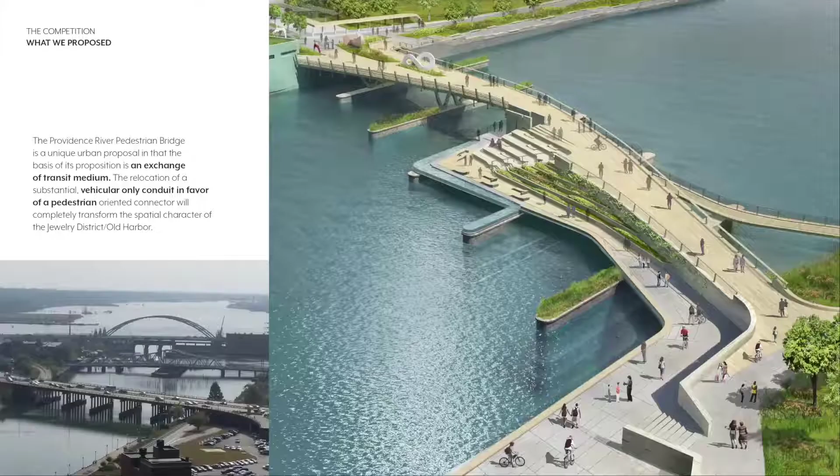This was way before I started working at inFORM Studio. The whole point of this project was to convert an existing vehicular bridge to a pedestrian bridge. Actually, more like relocating that bridge, because it created such a divide between different portions of the city. So they needed some type of connector to facilitate growth between different zones in the city.

What we proposed was more than just a connector. It's something that integrates properly. You have the knowledge area here, where up top you have RISD, the Rhode Island School of Design, and you also have Brown University, and there's a knowledge district. That's downtown, closer to the west. So the whole point is how do you link these two areas together in a way that you can achieve a cohesive and well-developed connector between these areas.

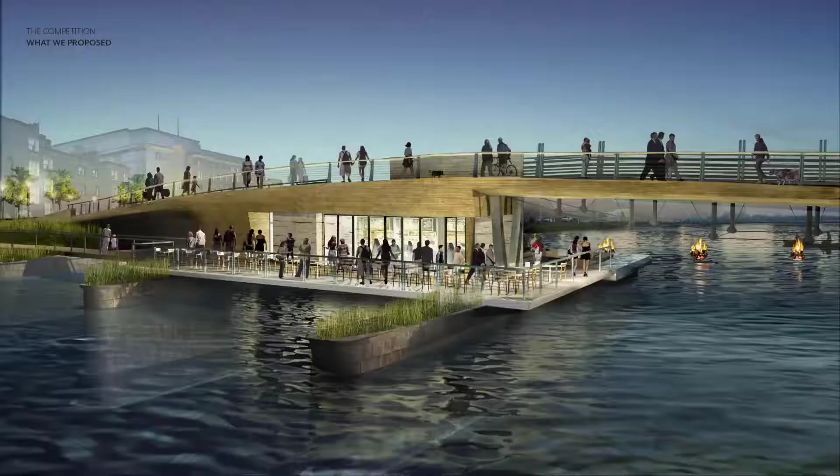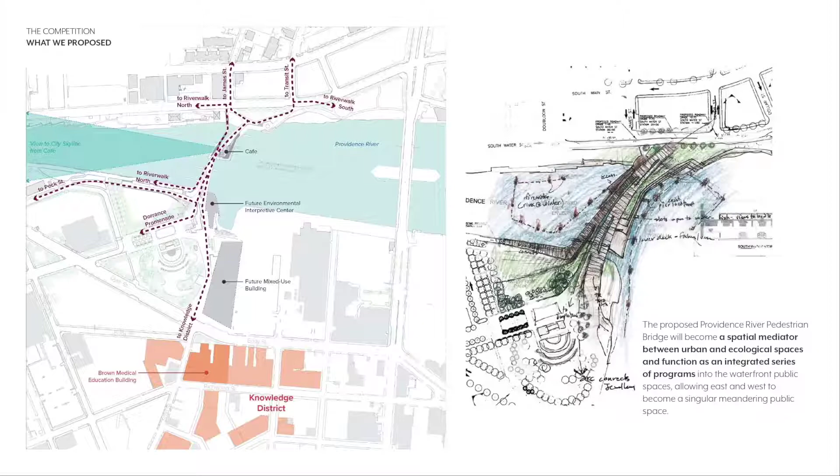This project was meant to have a restaurant or cafe type happening on the bridge. So it's not just people walking over, but people can stay there and actually experience it, create an experience for people, not just going from one end to the other end. This is a view of what we proposed, the cafe.

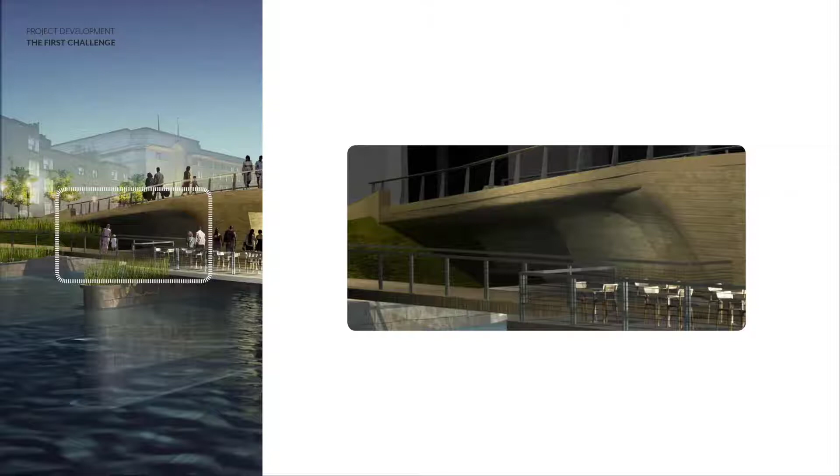The point of the presentation today is how did we achieve this for a project that was proposed in 2010. The challenge though is if you look in that highlighted area, it looks very clean, like we're trying to achieve this boat-like double-curved wood facade. But the reality is this is the Photoshop before it was post-processed. You can see that the textures here, no one's going to build this. This doesn't look like something you can build, this is just Photoshop. And when you take a look at the base file that was used to generate it, it's just not something you can work with.

Now it kind of looks like I'm calling my firm out, like guys, we just put things together. No, but the whole point is vision precedes computation. You have to start. They could have gotten to this point and said, we can't do this, let's redesign. Instead they stuck with the vision, presented it, won the project, and the question is, how do we now build this? That's how you start with the problem. Now you're trying to solve something, and that's the whole idea behind computation.

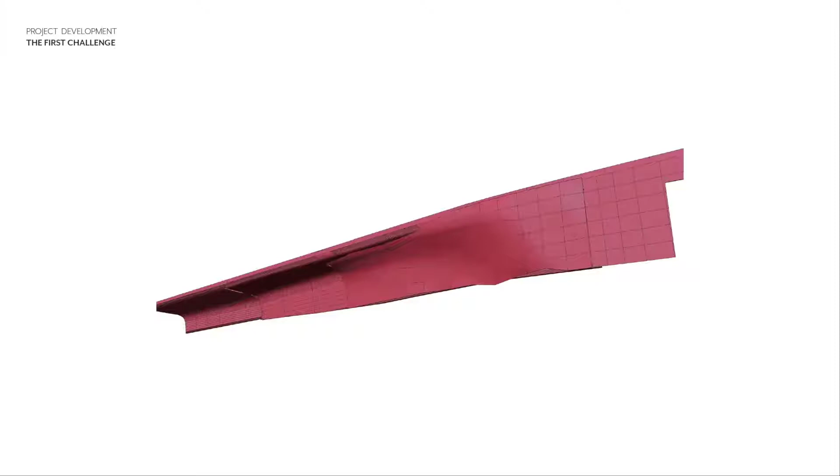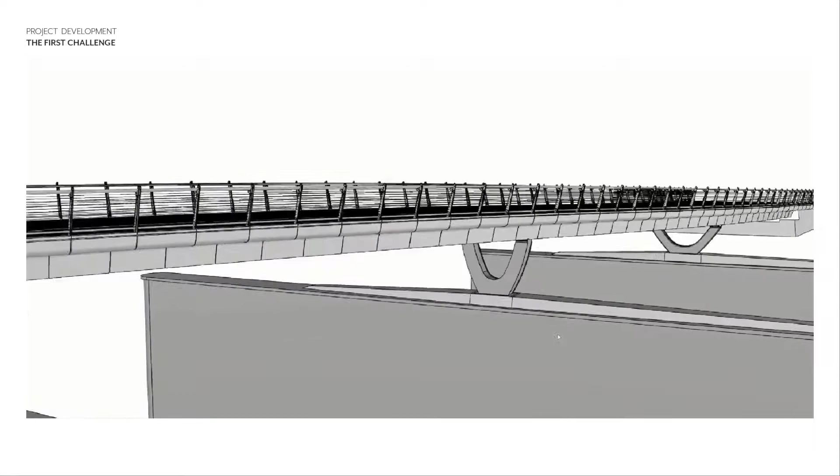So how did we go from this to this? That's that scheme, but how did we get from there to this? Is the question we'd like to answer today, because again, going back to that whole vision precedes computation thing, if you don't have a problem to solve, then you don't even know the right tool to use to solve it.

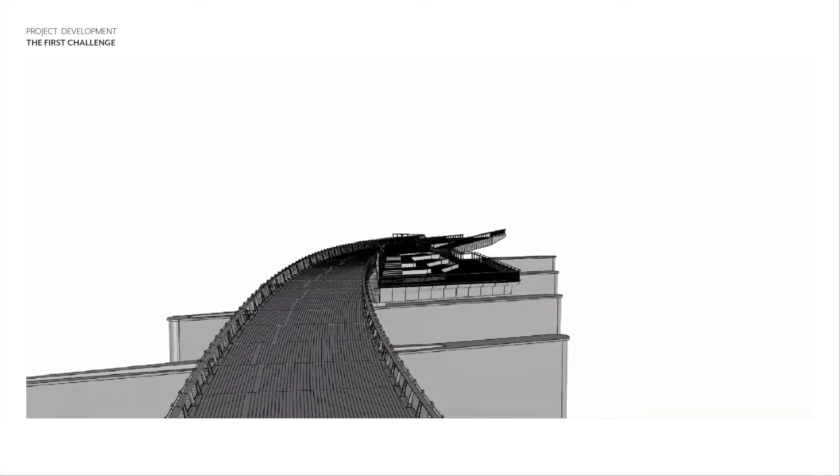That initial model was done in 3ds Max, and you cannot do any type of construction drawing whatsoever in 3ds Max. That said, all we had were the plans and some sections, to illustrate the idea behind how we see this thing working. So, can anybody guess what our solution was at this point? Jump to Revit, right? No, Revit can't handle the double curve.

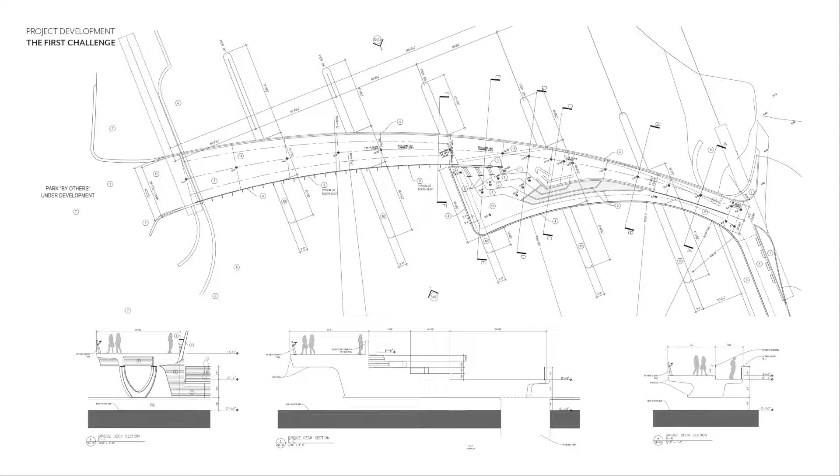Revit can, but at the time we were doing it, Revit was not the best tool, because I actually started developing this in Revit, and then I got to a point where I thought, this doesn't make sense. So I reached out to my bosses, hey, can we get Rhino? And it was easier than I thought, we got Rhino that same day. And yes, now this has a double curve, it's doing what we tried to get it to do.

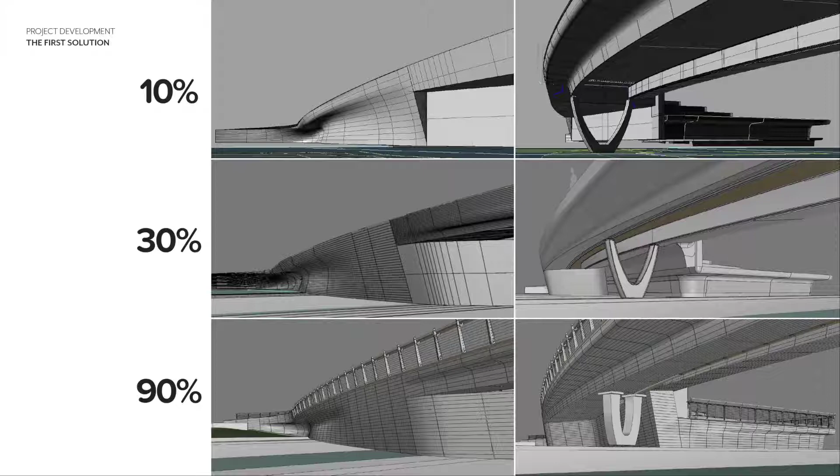But as we started going through the project, you can see the different phases. At 10% development, at 30%, it starts to get more refined. But at 90%...

Things just went crazy dealing with the repetitive process, because then we had to put in the engineer's drawing and some beams are sticking out, and I have to remodel this manually to get it to look right. It's driving me nuts. Design changes.

Mike's here, he's smiling. Hey Zub, can you change this? Oh my goodness, change it. Things go crazy. And then the form itself just wasn't practical to build. Like everything is just different. It isn't rationalized in a way that the people who are going to build this thing, they're probably going to look at this and just laugh, like, are you a joker or something?

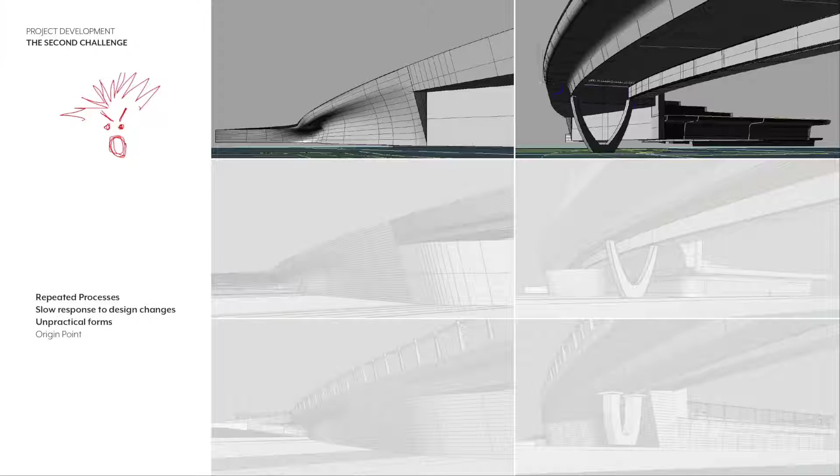The other part, which I didn't highlight, is managing origin points in Rhino. It's not a big deal, but the beautiful part about this is it got me to go to New York. And I was able to resolve it.

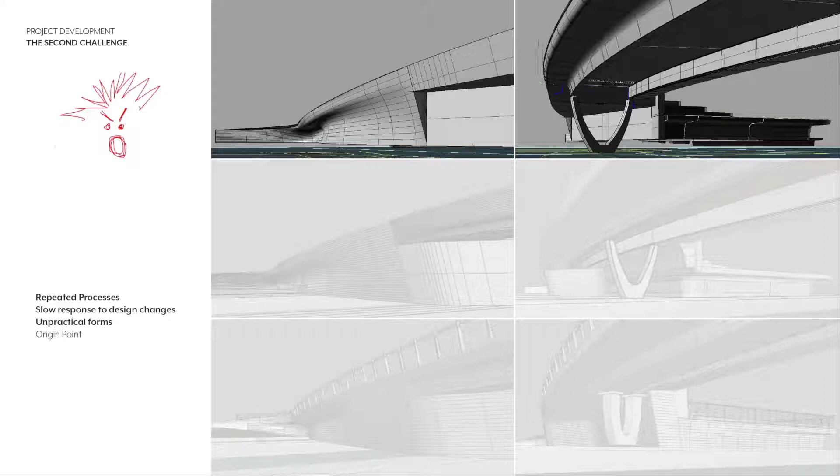But the interesting thing is, as I was thinking about this, computation seems to always send people to New York. For the people who use these tools, either you're going for a conference or you have a project, I think we should make it a goal for computation to actually come to Detroit. How about people come to think about computation and they think about Detroit? That should become a personal goal for everyone here.

And so out of frustration, my co-worker figured, all right, Zub, what you doing? And I kind of talk about my projects, and Renee tells me about Pierre, who is here. And I'm like, hey, Pierre, I'm finding this thing difficult. And Pierre goes, wow, you've already started doing it the wrong way. Oh, great, how helpful. But he pointed me, gave me pointers, like sent me to the Grasshopper forum, the community.

And why I posted this here is because computation requires a community. Like, you can't do everything yourself. You're gonna have questions, and you need people around who understand these things to kind of point you through how to go along. And also, I'm not going to take credit, but you need to be curious.

Like, I could have also been like how I said inFORM Studio had vision to keep pursuing it. I could have been like, well, yes, we can't do this after all. And then I don't know what will happen next. But I was curious to find out, wait, but people do these things. How do they do them? And that's the thing, curiosity drives computation. Something that's very important. And you can't teach curiosity. You just have to want to know.

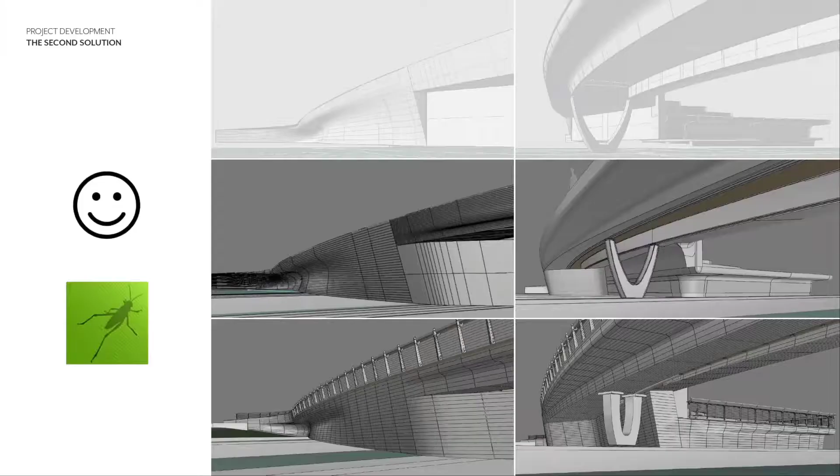So at this point, things were going great. Grasshopper was working fine. We got to this level of development. As you can see, initially, along this line, this is just an extrude along a curve. But as you start to see here, it gets complex. It's not uniform anymore. It starts to taper and become a flat panel.

There's no way I could have done that in Rhino, but then again when the engineer brings that structural file, things are just going to go crazy. So, how did we tackle this in Grasshopper?

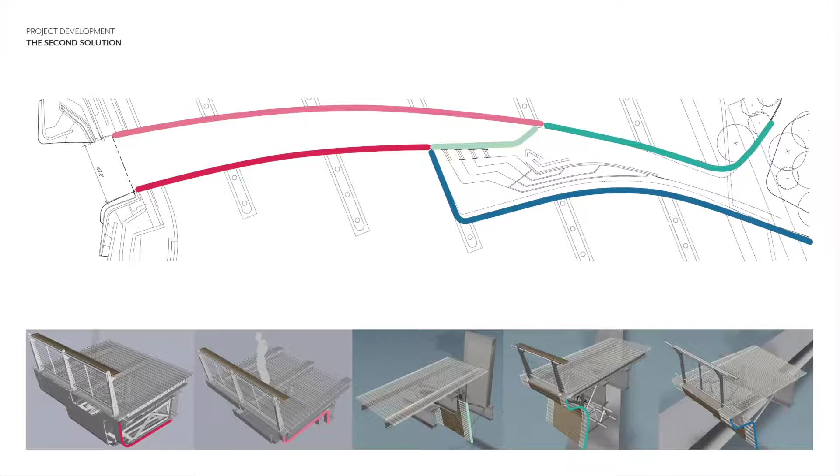First off, we decided to figure out what are the profiles, and by profiles I mean the section of each panel, like how are they positioned in this project. So we outlined 5 different panels. We knew we have 5 different panel types happening at 5 different locations in the bridge. And what we did was start to create a relationship between...

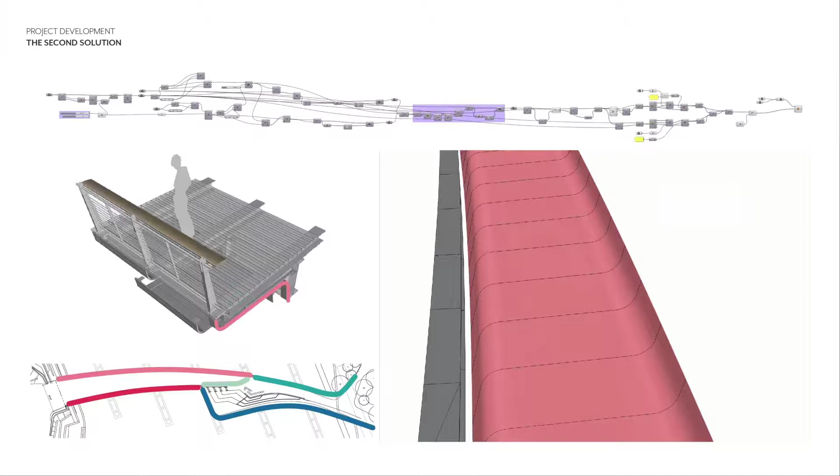Say, the curves or points, essentially, different points on different curves, and we started to manipulate that relationship. This is essentially different lines. We could divide, our input here were 2 lines. The top line, which defines the edge of the bridge, and the bottom line that defines where that bridge is at this point. So the point here and the point here, we created a relationship that resulted in a curve. And that means we can adjust everything in between. And that way, when the engineer decides to move their structure out, well, we can easily adjust to accommodate that without me having to repeat that process again.

And that's like Leland showed, that was the script. And I don't put it here to scare anyone. This is just our reality. Like, we have to deal with what we're up against.

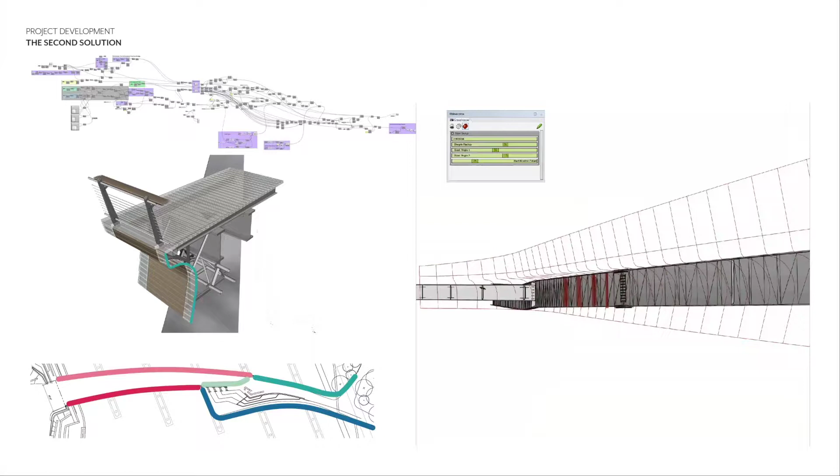And so the next thing, which was the more complex part of it, was the dimple. You can see that essentially it was just 3 curves that we had and used to generate that curvature of the bridge. So at this point we're able to get the surface from an array of different lines, and then with that we get the actual surface that we needed.

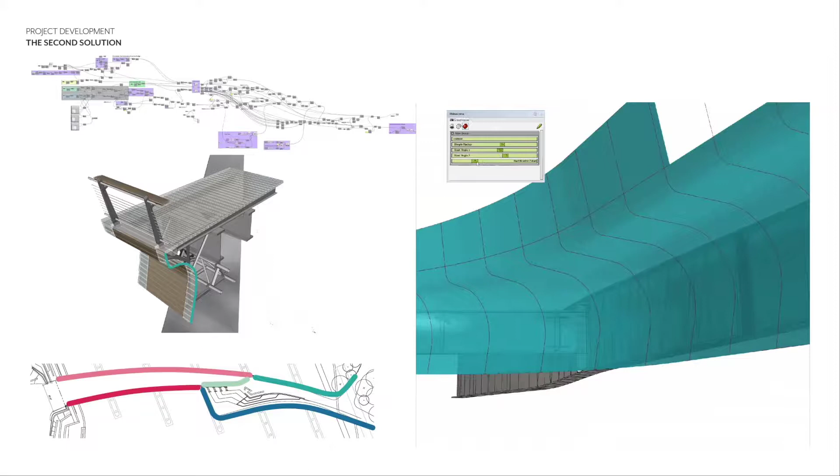Again, this is something that comes with Rhino, where instead of people seeing all the script, I can have them just view the sliders they need to adjust. No one needs to know what's happening in the back end. We're able to toggle in real time, hey, this form needs to do this, or needs to be away from the beam by XYZ amount, and we can pull toggle for that to happen.

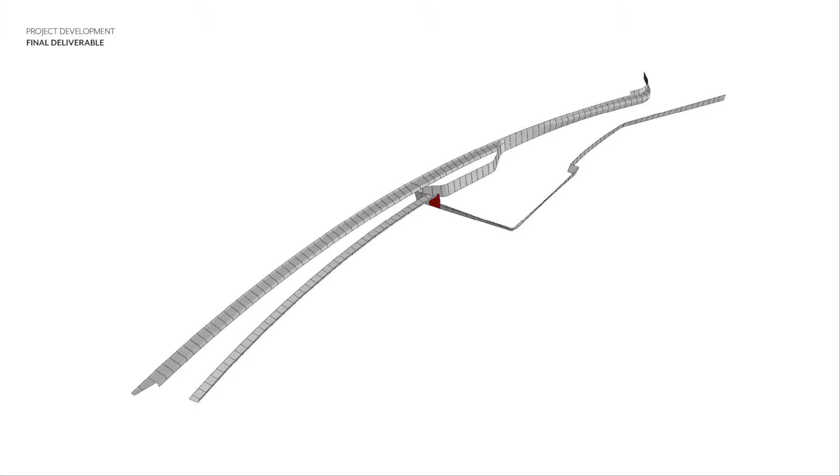And so essentially, we did that. We split the panels, and this was our deliverable. No drawings. The reality is we had drawings, but they were almost useless because this was going straight to the machine. And that raises a lot of questions.

Computation leverages data, not drawings. We're used to the whole idea of, oh, I need my construction drawing. No. Your drawing contains information, and that is what computation needs. Your information might be a line, it might be a point, it might be numbers, it might be text, but the whole idea is, what am I doing with this information?

And that's the beauty of Revit. Revit isn't for construction drawing, it's a database. So how do I take all that information and leverage it to make sense for me?

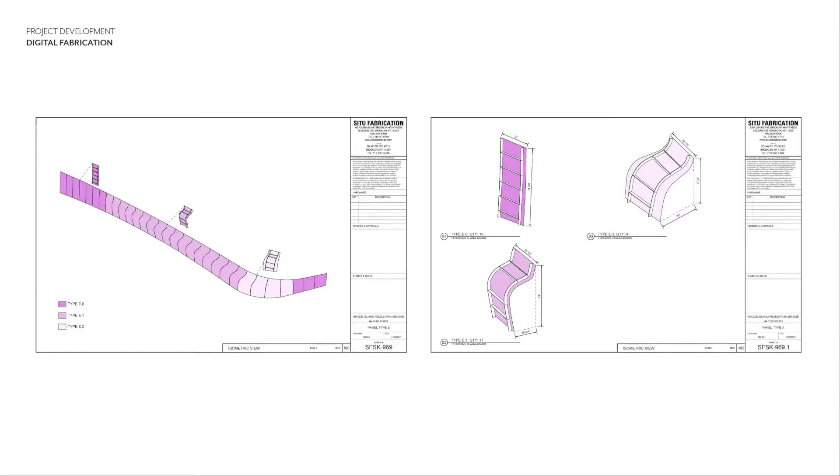But the whole point is, this was the workflow. We went from our panels that we gave them, they rationalized it in a way that it accounts for their machine tolerances and the tolerance of the material. And then they actually split the boards and created every fastening point, tagged every board, and unrolled every board so that, because it's 2D, it needs to be flat so the machine can cut it.

Can you imagine if they did this manually? No, they had Grasshopper scripts in the back running this process. So if we even made any change on the design end, it's going to update, and it's going to have a grid number, and all that process is streamlined.

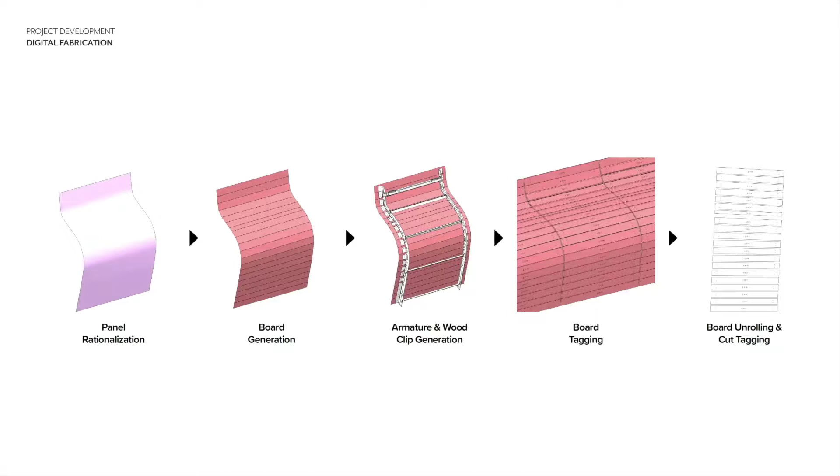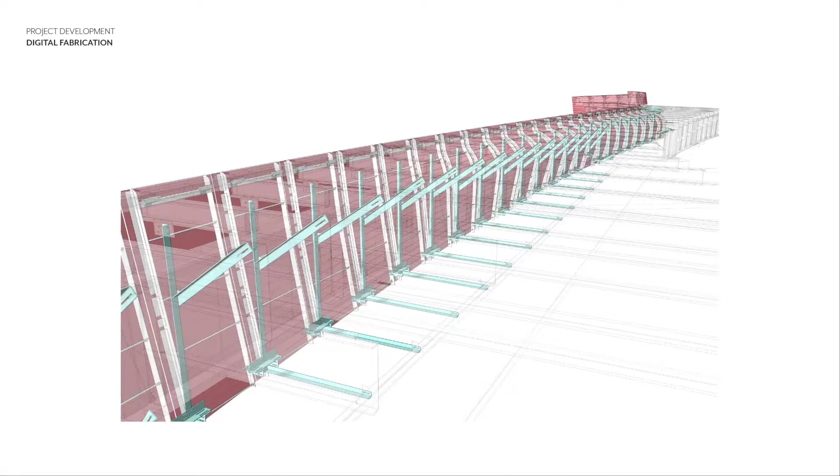I guess the next thing is, as we start to think about this, that means we're going straight from design to machine. That's pretty awesome. And that needs to make us, again, be intentional with that information. It raises a lot of questions. Who's liable for what? Who's in control of what? But yeah, let's start it and let's have this conversation, not shy away from the conversation.

So yeah, we started with that 3ds Max file, and this was the model that Situ Fabrication in New York, the guys responsible for the fabrication, sent us. At this point, I can sit on my chair and know that, yeah, this stuff is going to be built. And rest assured, it is going to be built.

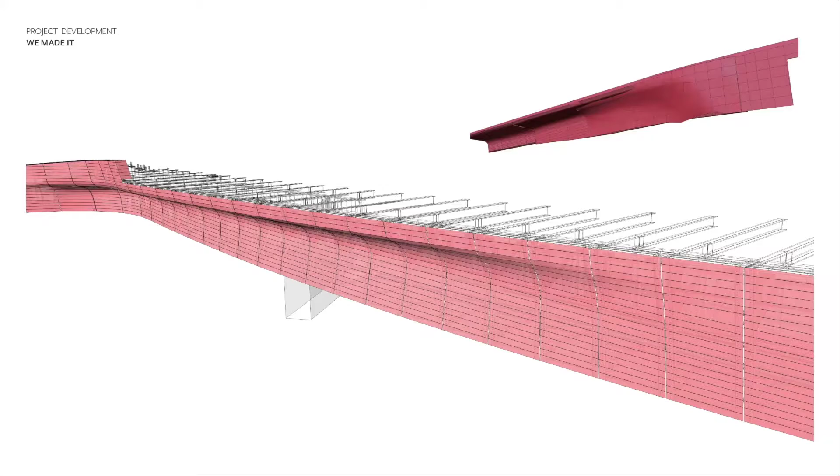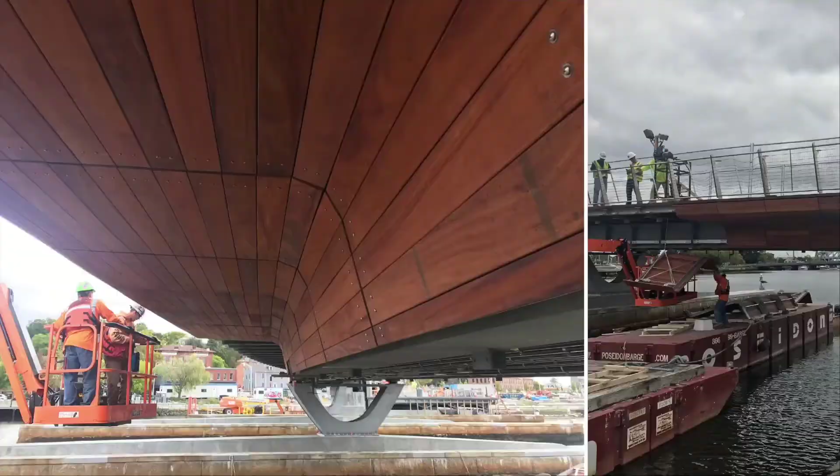And that's the bridge today. Well, this is maybe 3 weeks old, and the awesome thing is we get updates on this bridge every week by a resident who's eager to see this project come alive, which is just awesome. Every week we know where this project is at, and to see that you can create something that people relate with is pretty phenomenal.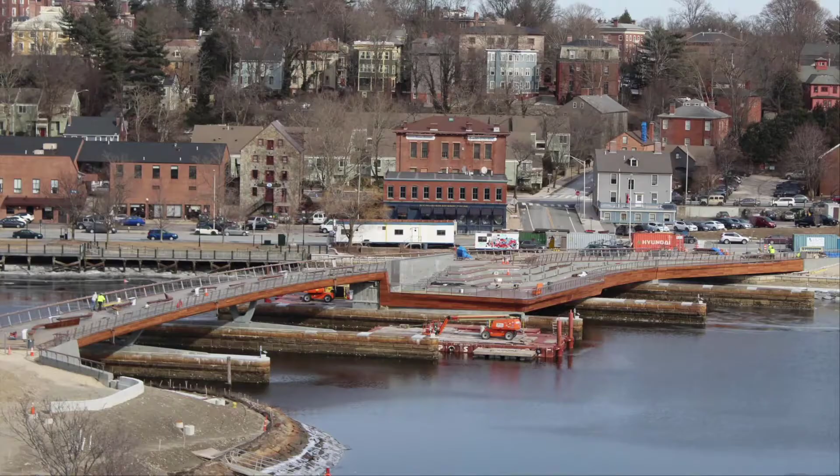And so the next thing, just like Leland said, is computation has a past. This project was 2010. We started in 2013, 2014. We did some computation in 2014. It's happening now. Again, this was the project that launched us into computation.

What we're doing now is some pretty sick stuff. And are we ready for the future? That's the question. Because now if we have all of this data, all of this information kind of just hitting us, our Revit models posting tons and tons of information, and then you see that kind of job description from WeWork, who have hired the people who developed the tools that Leland was showing us. What does our industry look like? And are we ready for it?

It's one thing for us to act like it's not happening, and it's one thing for this situation to tell you I'm here. You have to deal with it. So just a call to action. Are we ready for it? That's it.